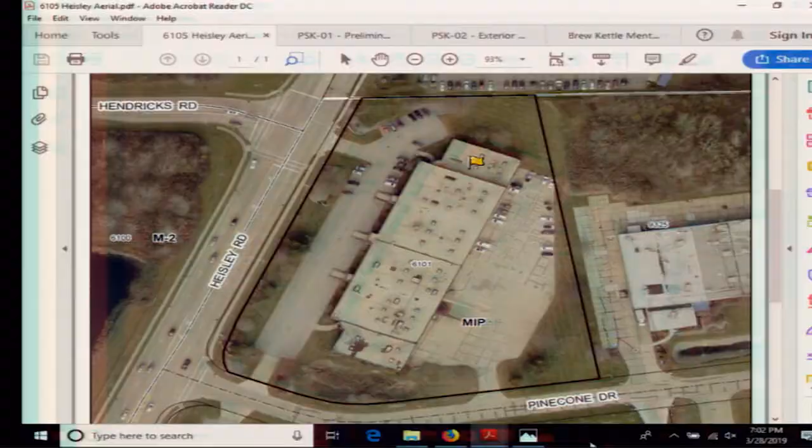Okay, anyone else wishing to speak in favor? Anyone wishing to speak against? Okay, we'll close the public portion. Kathy, anything from the administration? Nothing, Mr. Chairman, other than the conditions noted. Okay, anything else you'd like to add?

I just want to clarify that this will in no way be a surgery center. It's purely office procedures like mole removals, laser, skincare, things like that.

So Mr. Varga can show up? I don't see why he would ever need to see me, but he's welcome to.

So, Commissioner members, any questions for the applicant or the administration? Hearing none, I'll entertain a motion.

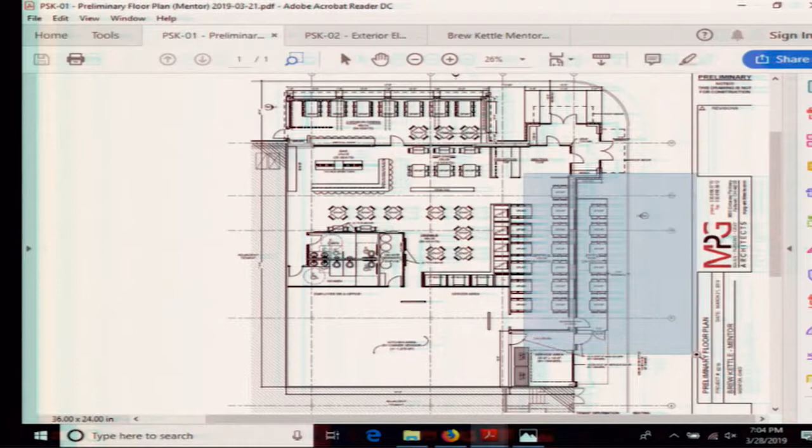I need your name for the record, please. Randy Parsons with MPG Architects.

Anyone else wishing to speak in favor? Anyone wishing to speak against? Okay, we'll close the public portion.

Kathy, any comments from the administration? Nothing other than noted in the proposed condition. You've read the staff report, so you're familiar with the conditions. Yes, sir.

Okay, Commissioners, any questions for the applicant? I have a question. The three-season dining space, that's new to the plan. Yes, sir.

How much space is there between the face of the building and the curb for a walkway? I believe there's 5 feet.

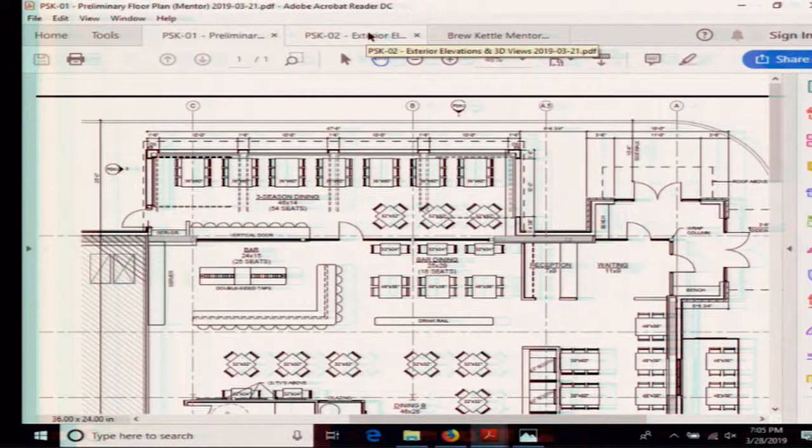Can you tell me a little bit about that space, since we haven't seen it before, and how that's going to work? That's a space that allows overhead garage doors to be opened when the weather's permitting, and allows people to sit out in like a 3-season type space, like you see on most restaurants today.

And it's completely enclosed in metal construction? Yes, correct. The sides are all standing seam metal, and the roof is standing seam metal. I've got a sample of the metal over there. It's the DMI metal product.

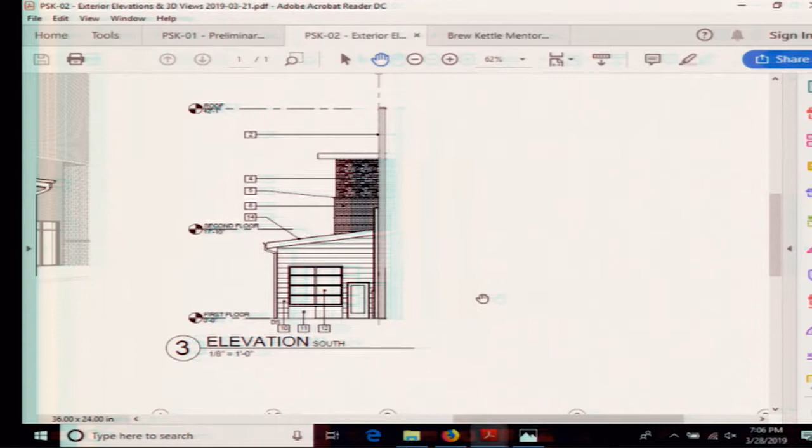Was there any thought about, if we could go back to the previous image, bringing some of that stone in the background around? There's stone along the bottom, and then vertical metal panel above the stone. We're trying to keep a little bit of contrast on the building, so we've got the stone on the building and letting this be its own little element that pops out from the face of the building.

Okay, well, go back again. This also ties into the owner's brand standards that we've generated for him for several other locations he's going to have in Northeast Ohio.

And the doors don't, it looks clearer here, the doors do not go down all the way to the ground. They stop at the sill, correct. So you're not going to have patrons walking out with drinks or what have you. Okay, all right, that's all.

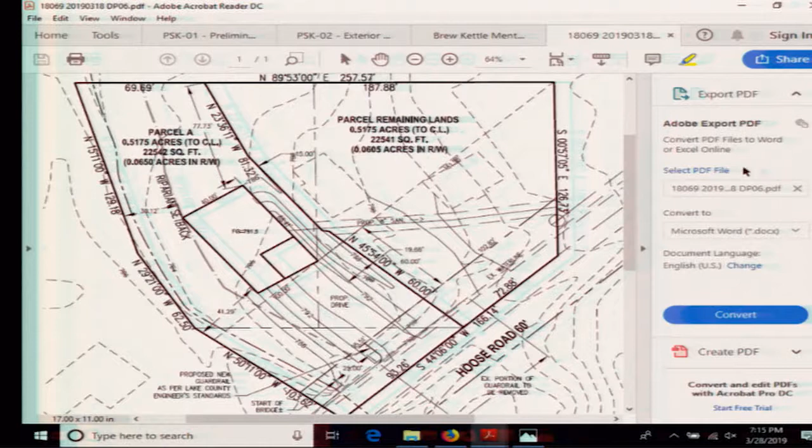We actually did some historical research on this. I'm just trying to find that information - at one time this parcel was combined with another parcel on the adjoining road, and then they split it. I'm not sure why it went through that process, so it's gone through a couple different renditions.

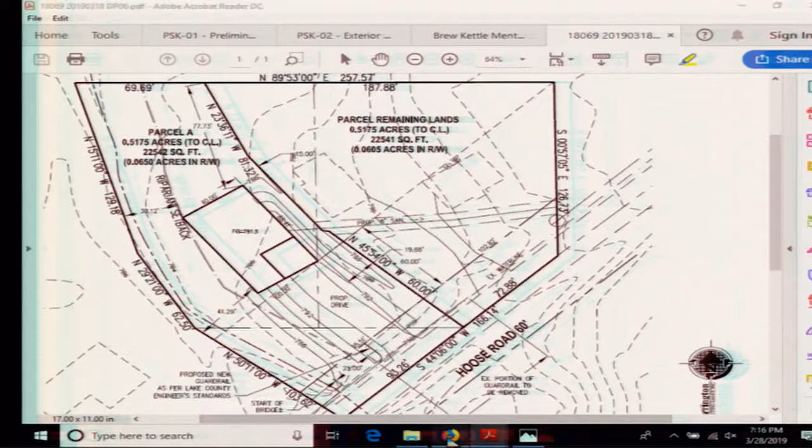We did have it at one point. It was handed out in one of the earlier packets. I don't have it with me at the moment, but we're going to see if we can pull it up from an older aerial.

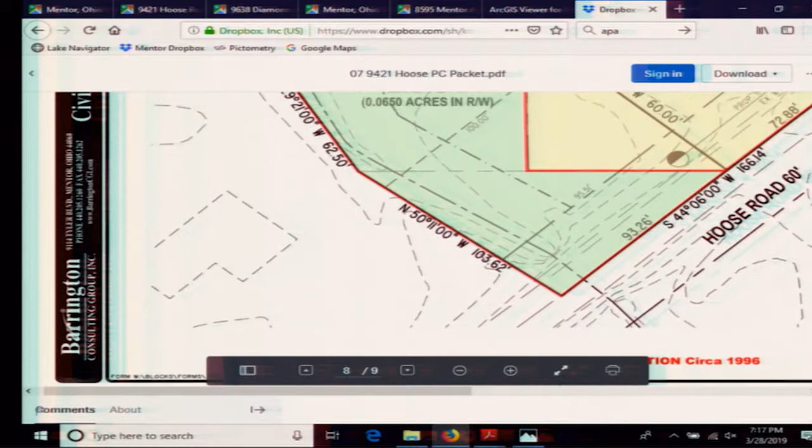That's the- yeah, so that one shows... Technology, anybody here from IT? Yeah, it's there. That's all right, Mr. Chairman. We can, if we shrink it down, there we go.

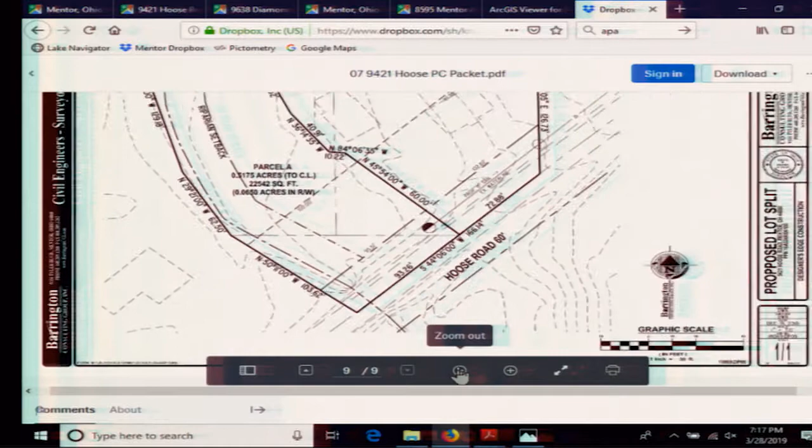The red lines indicate the prior parcel delineations. Do you recall when that was combined? It was combined sometime in the 1980s. So it's been a while. But as you can see there, and again, I don't understand why it changed again.

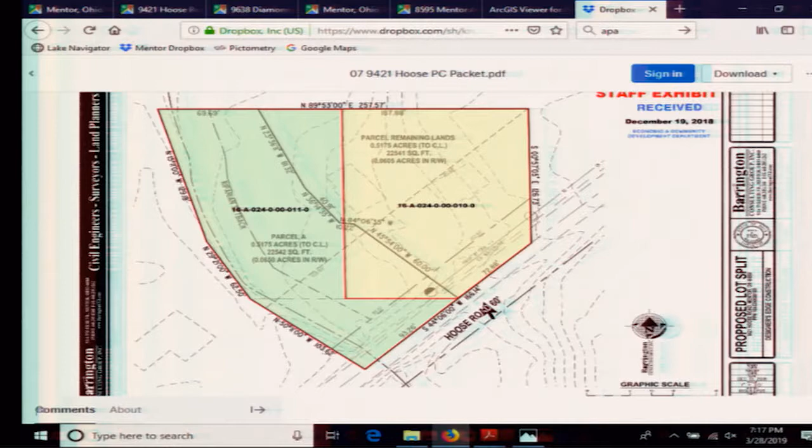It's a better frontage for sure for the lot. It was combined, but at one point it was split into two parcels. It's the same area, so they would still be, in today's code, both- well, they may not be both non-conforming, but I think one of them was. One of them was, one of them wasn't, right?

Go ahead, Mr. Sidoti. Mr. Victor, in order for the house that you're proposing to build to remain in conformance with the current code, you're talking about a 40-foot wide structure by 68 feet deep. Yes, that's what you're proposing? Right.

And the city engineer wanted to know what steps you will take to protect this proposed house should that stream begin to flood that's adjacent to the property. I was going to raise the grade up on that side, probably about 3 feet, and then build a poured wall. I was going to do a poured wall basement at 12 inches wide.

No more questions, Mr. Chairman. Thank you. Anyone else? Any other questions? Hearing none, I'll entertain a motion.

Ryan, would you want to keep that 792 as a condition? No, I mean, it's on his site plan, so I just wanted to be sure that 792 stays. Right, I will. I'll make sure.

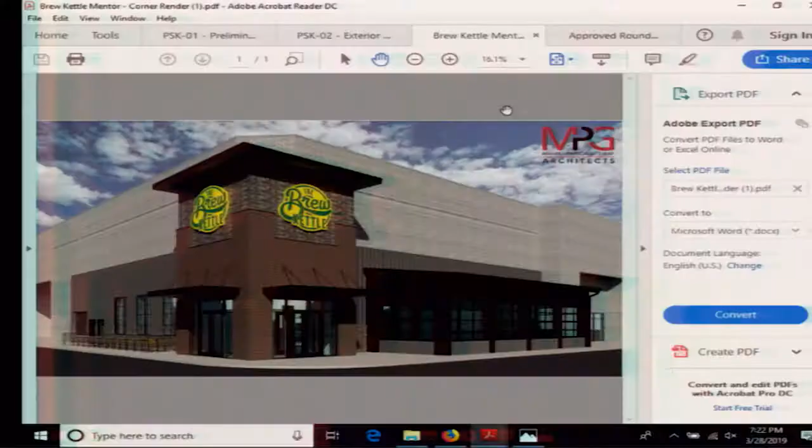We're creating a new restaurant called the Brew Kettle. It's a small chain of restaurants. We're introducing it into the corner of the mall where there was originally going to be a restaurant. This is a new restaurant that we're introducing into the corner.

Kathy, anything from the administration? They were very specific with the materials, and we've noted those in the conditions. And the landscape plan that was provided was actually an existing landscape plan. We would need that upgraded.

Okay, and you're going to irrigate it? There'll be irrigation for the landscaping. Yes, and you'll turn it on? Maybe. A lot of people don't turn it on. That's been a problem.

Commissioners, any questions for the applicant? Mr. Sidoti? Thank you, Mr. Chairman.

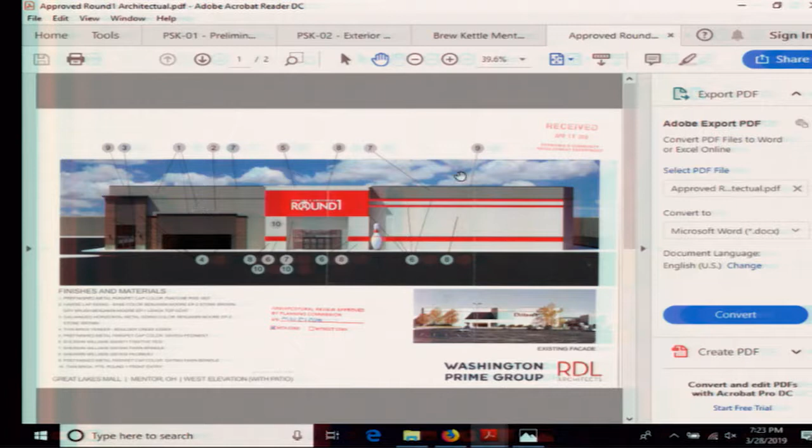On this rendering, the material above the 3 garage doors, do you have a sample of that material? There's the metal, and the color would be musket gray, this is musket gray right here. So it comes in that color? Yes. There's no painting required? No, it comes pre-finished.

Is there any reason you didn't consider extending this brick veneer south to the edge to give it a fuller look? Well, it's the same thing on the other side. We tried to let the new material be framed by the existing building instead of just applying the material, looking at it from a 3-dimensional aspect.

Mr. Sidoti, you might want to look at that particular one, as the previous rendering was slightly modified in the newer drawings, so what you're seeing on the round 1 example is a little different. You can look at the screen up there, he's got the new rendering up.

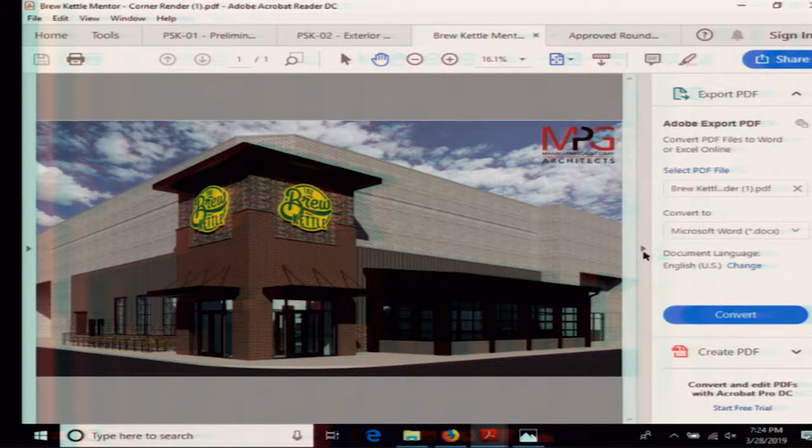And that lap siding, is that what you're putting down on the sidewalk area in front of the... No, there's no lap siding anywhere. It's all metal stone panel, yeah. It's all anodized metal panel.

Thanks, Mr. Chairman. Anyone else? I have a question. Go right ahead.

With the new exterior areas, the exterior patio and the enclosed patio, both are extending out where there is currently a landscape cut out in the sidewalk. What happens to the landscaping, or where does it go? You know, we were asking for foundation, you can see it there on both sides. Now those would be in conflict with the location of the extension. You're correct.

We've worked with Washington Prime on that, and on either side of the main entry where there's a little indent, we're going to introduce beds there. Our intent is also to provide a couple raised planters, large-scale pots, out in front of the facility. So what goes in the pots in the winter? Nothing, that's part of the problem, I think. No, we would provide some mix of materials, so you may have small arborvitae or boxwoods in those pots along with some flowers.

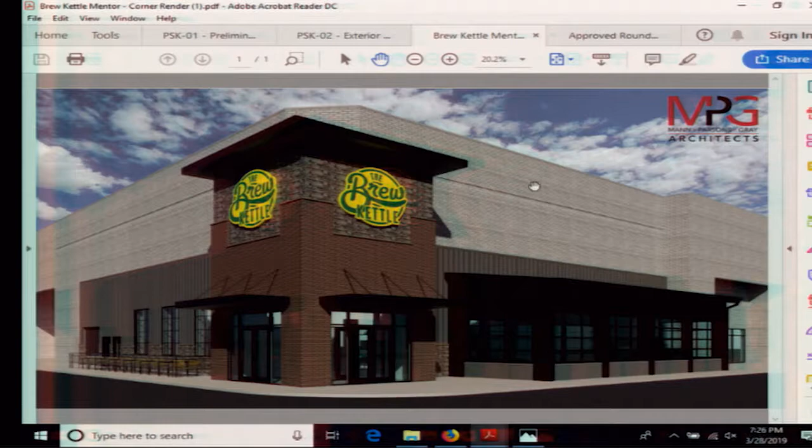Does that meet the spirit of the landscape ordinance? Well, we're going to have to look at the updated landscape plan to really give a fair answer. I think as long as the applicant adheres to the foundation plantings we talked about along the walls and gives us a detailed plant material list, then we can. Which you can do. Yeah, absolutely, they'll receive that.

My reaction is that we can see the area in the back on the screen, where there's both foundation plantings and some islands that still allow for passage. I don't know if they're going to put trees there or if it's just all going to be low landscaping, but we would want to still see something substantial enough so it doesn't look like an afterthought. No, we understand that, sir. Thank you, Mr. Chairman.

Mr. Cook? The outside patio facing north, I'd like to see some sort of hip wall with some vegetation on top, not a complete cover from the existing Macy's parking lot, but while you're sitting there, a little bit of coverage, like a short hip wall with vegetation in it. Or a fence above it. Yeah, not a complete screen, but something to give you coverage while you're eating. The sun will be behind you, so I can understand the desire to have that.

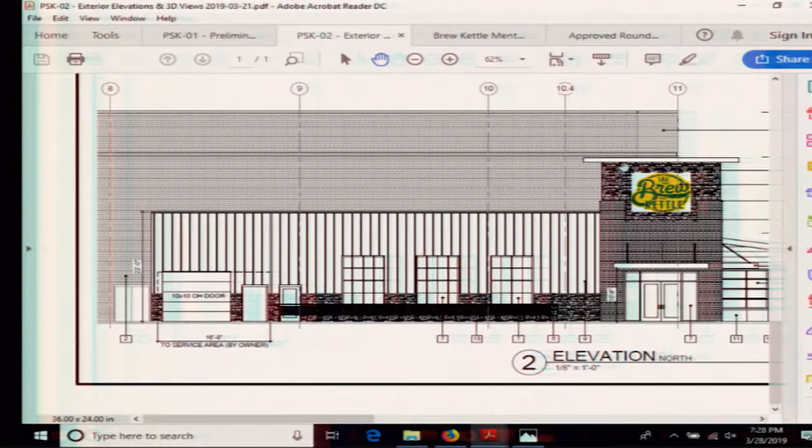One other thing is that when this corner was supposed to be a Primanti Brothers, there was some sanitary work done there, and it's incomplete. So part of this deal is we're going to be installing the grease interceptor for the tenant before they come in and do the work. Okay.

It got capped off in a few places. Okay, we're aware of that. So make sure you submit plans to Lake County Utilities for it. We're working on them right now.

All right, thanks. So let me ask a question of the city. For the outdoor patio with the light gauge fencing around it, yes, we would be looking for bollards. What about the metal building?

To protect them specifically because they're 5 feet from the driving lane. The other enclosed patio, we're within 5 feet of this driveway. Do we need to concern ourselves with a bollard condition there?

I mean, it's really just, I don't know. I guess they'd hit it, right? Well, I thought about that, but it's also almost more like it's just a large window, and I was in debate about that. I was just thinking about the piers, not so much.

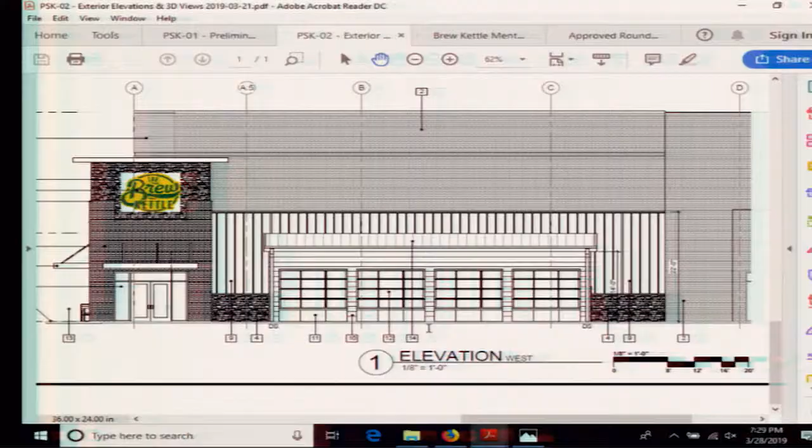That's where they're gonna put the landscaping anyway, right? Yeah, well, there's no room to put landscaping there. Well, they said they'd take care of it. That's just, there's not enough room. Well, I know, it was just a thought. I'm not saying we have to do it. I'm not dictating to do it, but what are you suggesting, for sake of discussion?

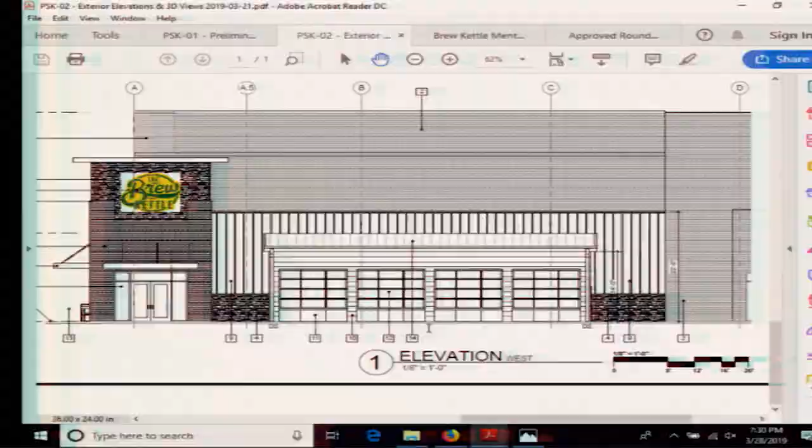I was suggesting that we could provide some steel reinforcing within the wall in the lower portion and on either side of those overhead doors, so that we don't have bollards sticking out in front of the building. Yeah, I'm not trying to force that, I'm just saying. It's almost the same condition, and the metal construction is relatively light gauge. If it was just reinforced to protect the occupants in case somebody hopped the curb and hit the corner, we wouldn't want to see that.

All right, thank you. Mr. Chairman, Mr. Sidoti? The handicap spaces that are being created right now, you have the area cordoned off. Are those for your facility to meet your requirement to provide handicap parking, in front of Round One?

Anything else from the city? Maybe we could add a condition about the reinforcements on that patio wall facing. And when you put the bollards in, we don't want it to look like we're tying off freighters. They need to be some sort of decorative bollards, as opposed to the traditional big yellow concrete bollard. Non-freighter type, we understand. Not an unloading dock.

Anything else, commissioners? Entertain a motion. Where are we at here? How many conditions?

I'll make the motion with 4 conditions, adding the reinforced steel. Second. Mr. Varga? Yes. Mr. Cook? Yes. Mr. Cicero? Yes. Mr. Perkovic? Yes. Mr. Sidoti? Yes. Mr. Tiedemann? Yes. Mr. Snow? Yes. Thank you.

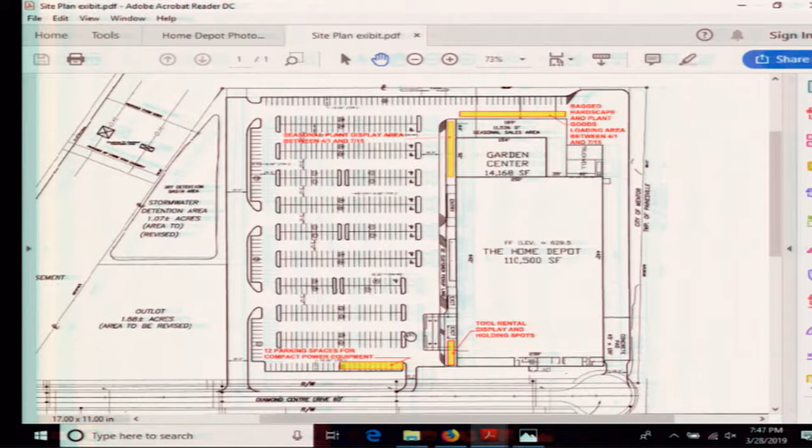You could make it as big as the building as far as I'm concerned, but that certainly would be- rather than put spaces out in front of the building, those spaces I wouldn't have a problem with. Okay, we didn't know that was an option. Well, I'm throwing it out, not making the decision, but I'm just asking. If you could make those spaces down at that end into the equipment storage area, it would be akin to where we already allow you to store the big bags of fertilizer and stuff. And that could be a permanent walled-in area, back within the face of the building.

So behind the face of the building, envisioning a wall that would go that whole length of that curb along Sam's Club then. Yeah, as big as you want to make it, but you could make it the full size of the end of the building there. And you could put gates on it, you could lock stuff up. I mean, we're already letting you store stuff there, right? I don't want to speak for everybody, but I'm just looking for where's the wiggle room here. It's not in the parking lot, it's not in front of the building. Because we could work this same scenario with other people who might come to us and find other acceptable solutions like that. I'm thinking down the road, it's behind the face of the building that you store this in an enclosure.

Mr. Chairman. Mr. Sidoti. I want to piggyback on Mr. Vargas' earlier comments. Ms. Mitchell, you yourself said we're seeing this more and more, okay? And it seems like we're opening the door a little bit each time this issue comes before us. Maybe it is time, Mr. Vargas, to revisit this and decide what do we want to do with these retail establishments and the issues of storage outside. I remember sitting here judging two or three retail establishments, much smaller than this, wanting to put some propane tanks or an ice machine outside, and we beat them senseless and said no, you can't do it. And they leave mad, but we said look, you can't do it, our regs don't allow that. It seems like there's a little inconsistency here.

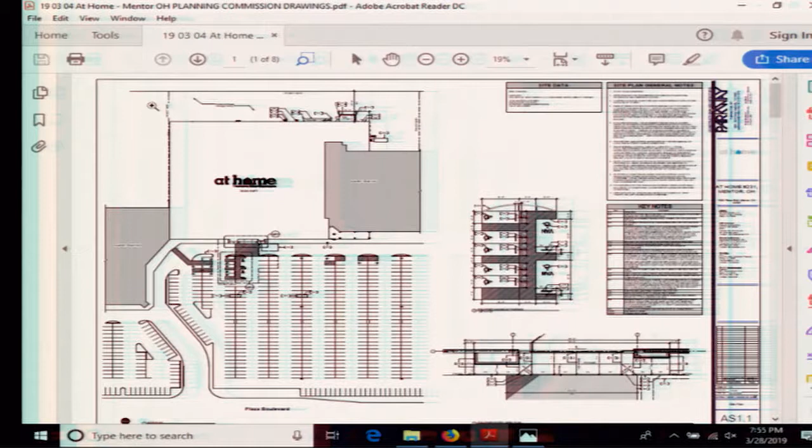As far as the staff report goes, I'd like to very quickly run through the proposed conditions. Item 1, comments should be addressed in writing, which we can do. Item 2, no outdoor storage or display. At Home does not do any outdoor storage or display.

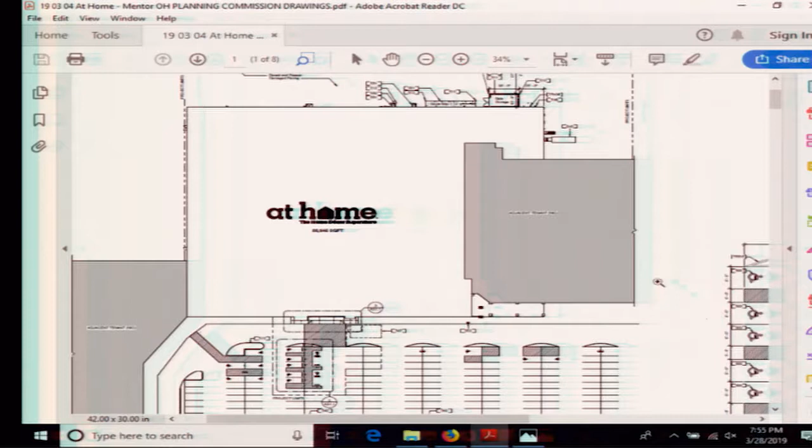The concrete masonry units shall be replaced with a brick similar in size to the existing brick of the building. What we propose to do on that is use a split-face CMU.

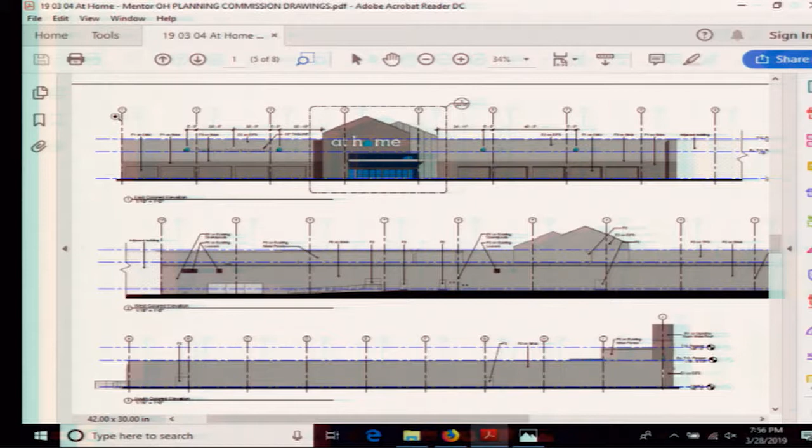On the left side of the building, we'd be infilling the existing storefront glazing. On the right side, we'd be creating a new wall to fill in that current void space. We wanted to establish a rhythm across there, and also wanted to use some varying textures to emphasize that rhythm. We'd like to use the split-face CMU, but we're willing to go with the brick if that's the commission's decision. Approved building materials, I think is pretty straightforward.

Item 5, pursuant to the signs, we acknowledge that the icon light fixtures would be considered part of the signage package.

As far as item 6 goes, the landscape plan, At Home does not control the parking lot or the site. All we have is basically a curbs-in deal. So I'll let Jeff address that.

Currently, there is very little landscaping there. We are more than willing to invest some money to upgrade it, but as you can see, there are hardly any islands in the parking lot. We do have islands separating the parking from the main drive lane and the storefronts, and I think we do a pretty reasonable job of keeping vegetation in there. It's somewhat difficult in that it gets salted all winter long, but we have no issue with investing some money in landscaping.

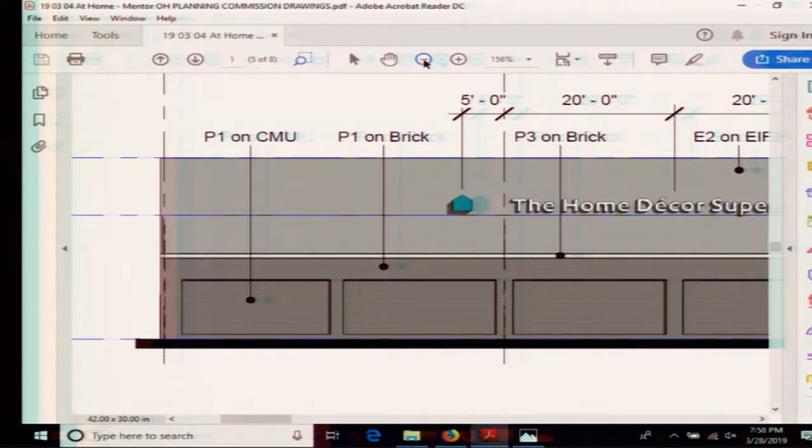And then item 7, the photometric plan. I just got one today, by the way. We can certainly provide that.

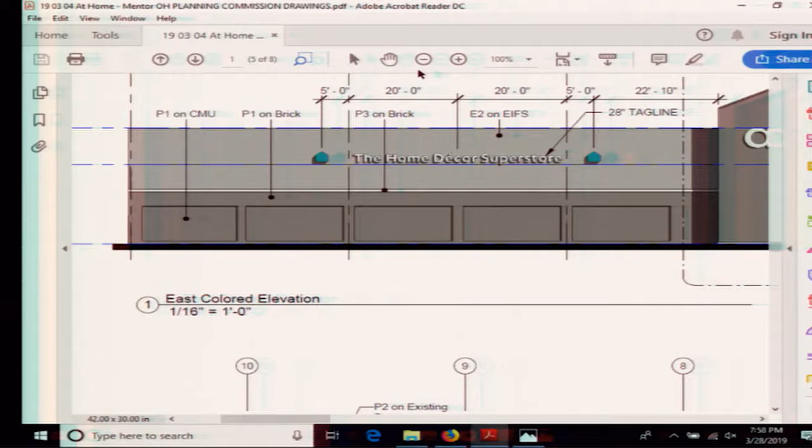Although we'll have to work with them because right now we don't have the information on what those fixtures are and so forth. For the new fixtures, the intent would be on the back and side to replace the existing wall pack fixtures with new LED fixtures. And we can certainly provide the photometrics for that.

Commissioners, questions for the applicant? Mr. Sidoti: Larry, can you go back to that picture you showed when they were talking about the landscape and shows the parking area? Does your project also include repairing and fixing this parking lot? Yes.

Last year, we spent $100,000 on asphalt work. Most of it was done in front of Giant Eagle. I have the same budget for this year, and the plan would be to do the area in front of the proposed At Home.

So it's part of your plan? It is part of the plan, and all I have is kind of a rough drawing of what we did last year and extending it this year. So it's probably not necessary to...

Right, okay, rewire everything. Larry, has the applicant submitted building materials? Just what the building elevations indicate. We just got it switched over.

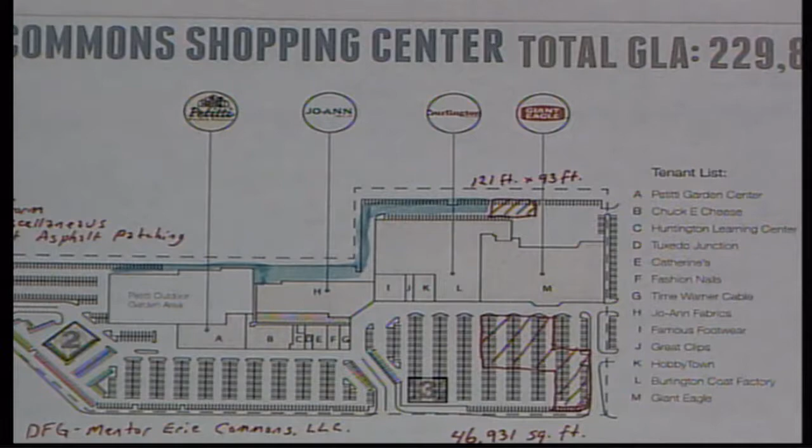Yeah, that's a good point. I was looking on Google at what your stores look like, and a couple of them look different colors, so I'm just curious which version will be put up. Don't forget, let's have a slide that shows the colors a little bit so we can all see some of that.

One of the things I would like to add is Giant Eagle will definitely have a facade change in the not-too-distant future. So I don't think we should spend too much time looking at Giant Eagle and trying to match that facade. I think it would be better if we were to look at Jo-Ann. Okay, go that way.

I want to pay you one compliment. You got rid of the shoe and clothing bin drops in the parking lot. I appreciate that, those were not supposed to have been there. Those companies have a habit of just dropping them, and they tend to disappear somehow.

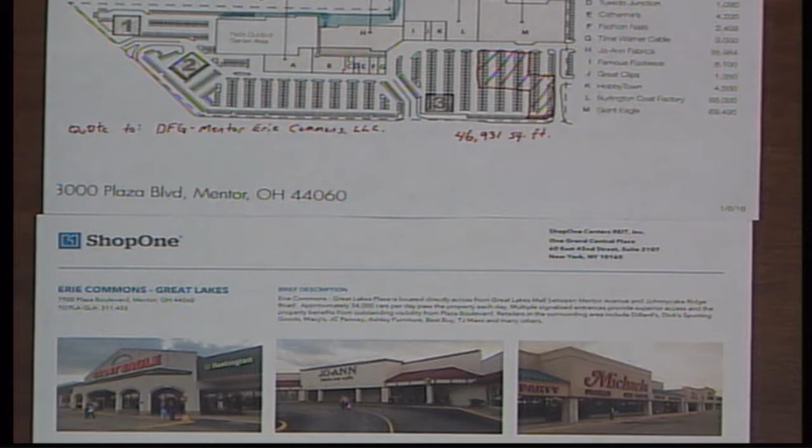Take a torch to them? No, I'm kidding, I make a phone call and they go away. And there was one that was in Great Lakes Plaza not that long ago. Right, it is gone now. Okay, good.

I just want to emphasize what Mr. Sidoti said. I am curious as to the coloring, because there's different versions you've done, or the franchise has done. I'm not totally sure of what you're looking at.

What we're proposing is the blue, or there's a blue finish and there's more of a beige-gray finish. I think that may be the effect of the sun. The colors, the At Home dark gray and the At Home Jennison light gray, have been the standard colors for the last 5 years, and we propose to use that on this building as well.

That's what the CEO likes, and that's what gets approved. Yeah, and I'm not opposed to it, I'd like to see it.

Understood. And along those same lines, this town is very sensitive about liking to see brick. So in terms of block, a utility brick or a modular brick, any kind of brick you want, but they'd rather see brick than see block, especially split-face block, which doesn't make people happy around here. So then the question is the color of the brick—in this environment, do you match some of the other colors, or is that dictated by corporate?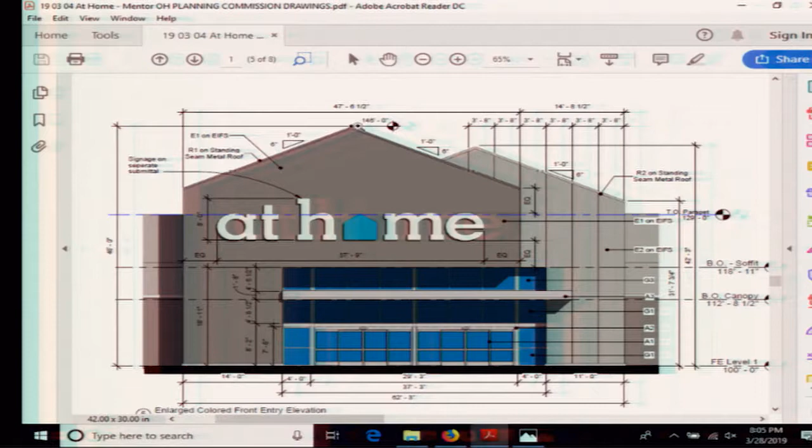And there's one other comment that I would like to make about the existing architecture. The entrance to what is currently Burlington—one of the reasons this is before you now is Burlington wants a store less than half the size of what they currently have. They are going to be moving to the former H.H. Gregg in the shopping center next door.

So what you have there are actually interior ceiling tiles on the underside of that canopy. That is a remnant of when this was a mall and that was an interior section. It is a hideous architectural element currently, and At Home is going to make that go away.

No, I'm speaking for myself. I have no problems with the nature or the character of the project, other than we need to see the materials and the colors displayed so we understand the environment that it's in and how it looks. Barry, do you happen to have the samples?

May I have the envelope, please? If you want to get those out of the way, or turn them upside down so they have a white surface.

The typical exterior scheme is light gray on the upper portion, dark gray on the lower portion, with Sherwin-Williams Greek Villa as the precise color—basically just a slightly off-white that acts as a pinstripe separating the two materials. And then this would be the EIFS used for the main entry feature, and the roof samples for the standing seam roof on the entry feature.

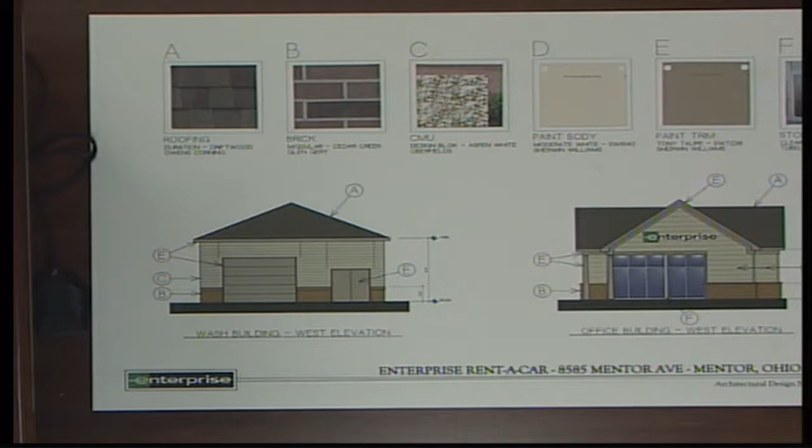So the two I have some concerns about: Number 2 was talking about the window patterns on the building. That elevation that shows up on there shows the side view. It doesn't really show the street view. Let me see if I got one here.

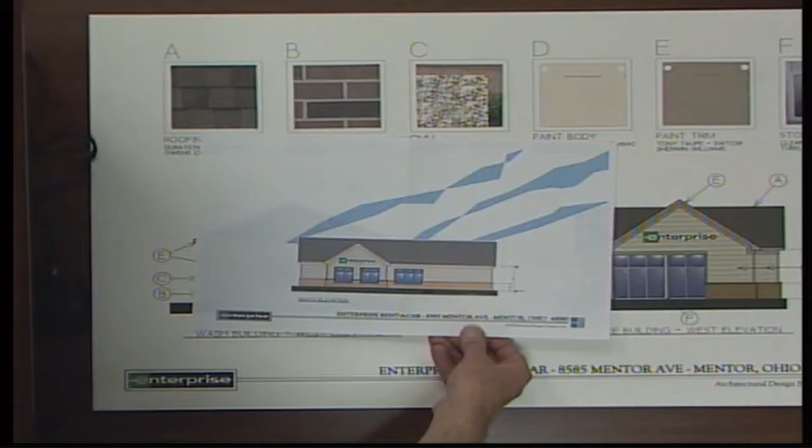This one shows the street view. We're not strongly opposed to revising it. We did send in a revised elevation to the city as well to look at. My preference would be to stay with the aluminum storefront.

The primary reason we would like to stay with the storefront is it's just a little bit heavier duty product, and with the amount of traffic that we get through there, I just think in the long term we're better off with that particular product.

I will say that in our design, we do have a window pattern that is a kind of punch window pattern, which is pretty consistent with what the older buildings were. If you go down that street, the residential structures, a few one-story, some two-story, are all really similar with a punch window opening. The primary difference is those particular windows were double hung windows, common in the early 1900s when those were built.

So we're not really putting a double hung window on there. It may not be really apparent in the initial drawing unless you look hard, but in addition to the storefront, we do have all those windows cased. We're using a brick mold around the windows that kind of reflects that, so it's not like just a straight aluminum storefront that goes right to the siding.

Because we're very concerned about trying to get through tonight and move this project along. The elevation above shows using more traditional clad wood windows like you'd find in a residence. The primary difference with the windows above versus below is you have a double hung window in the main portion with a transom above. I widened the casing on those particular windows and added a little bit deeper head across the top.

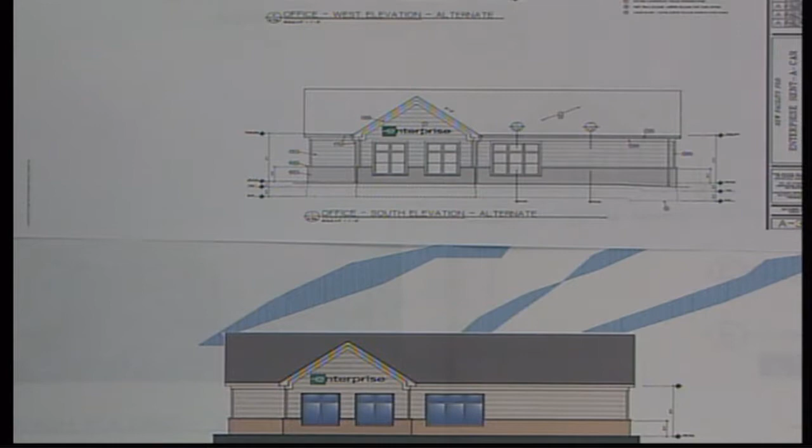What happens when I make that change to the windows, I also want to change the elements at the entrance. So instead of a storefront where I'm looking for heavy-duty use and durability, I end up going to a clad residential, light commercial type of unit. It gives a rail and stile door look, with some fixed panels and one panel that operates, giving a more traditional residential look, but I don't think it's quite as durable. Preference would be to stay with the aluminum storefront, but if the commission has difficulty with that, we could move to this type of unit.

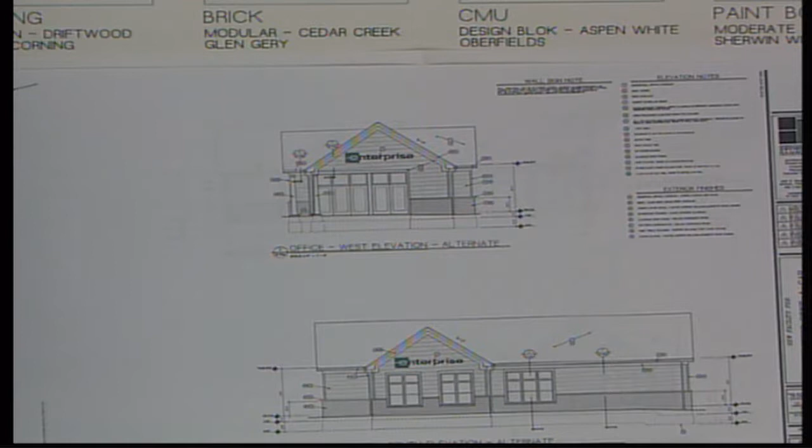The second issue, and the one most critical to Enterprise, is the photometric. We've submitted two photometrics to the city for review. Could you flip up the site plan? That would be really helpful.

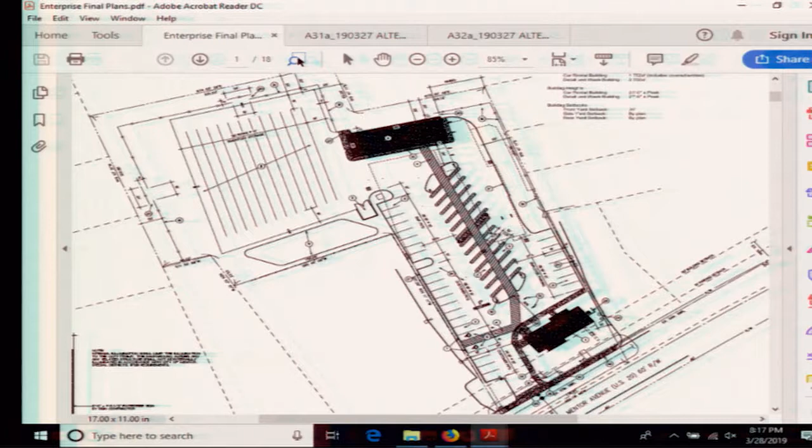One thing I think is important to understand, and I think the commission understands it, but where we're running into difficulty with the city code is that center strip area where the cars are dropped off and picked up by customers. The city is treating that as a parking area. The problem with calling it a parking area is that since we're doing pickups and drop-offs there, it's very important that we be able to inspect the vehicles when they come back, and customers have the opportunity to go around the cars and verify they're in good shape.

The lighting levels the city looks for in a traditional parking lot are extremely low and don't offer us the opportunity to provide the kind of light necessary to inspect these vehicles. So what we did is provide a photometric that illuminates that strip with much more intensity. The city always talks in lux - I keep thinking in foot candles - but we're approaching 30 foot candles on that strip area in order to inspect the vehicles. We've done this on multiple Enterprise locations; it's very important to have adequate light.

On the second photometric, when the store is closed, we would dim all those lights. Once dimmed, the entire parking area falls within the city requirements for illumination. So it's important to us that we be able to illuminate that center strip area to higher levels during the times the store is open.

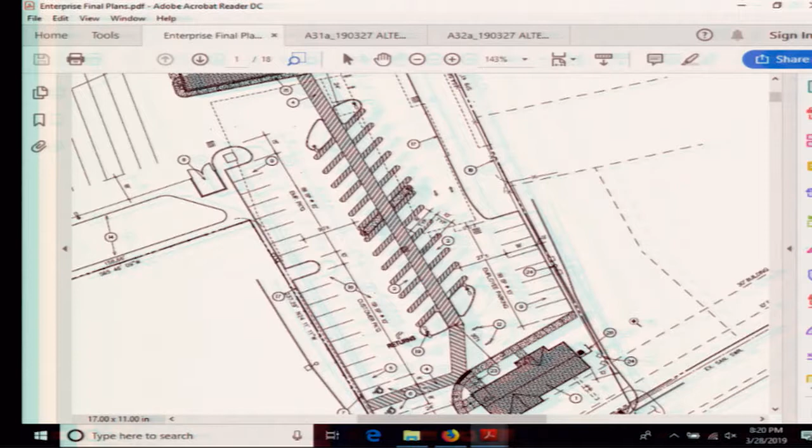I'm going to interrupt you there for a second. I'm not sure that's within our purview at the commission level to deviate from those lux requirements. I think if you want a deviation, that's something you'd have to take to the BZA. So you're looking for a deviation on the light plan. We have a plan in place, but I don't know that the commission can change that requirement. Also, if you're familiar with 116903, it talks about the general requirements - there are ways you can make part of the parking lot brighter and less bright.

The problem is that we're much higher than that 300%. Part of the issue we're talking about is you're assigning the lighting levels in this area as if it's a parking lot. But it's really not a parking lot. It's a different function. While there are vehicles there, it's not like a traditional parking lot you'd have in front of a building. So while those rules apply, I think we're a little different than that, and we should treat that area differently.

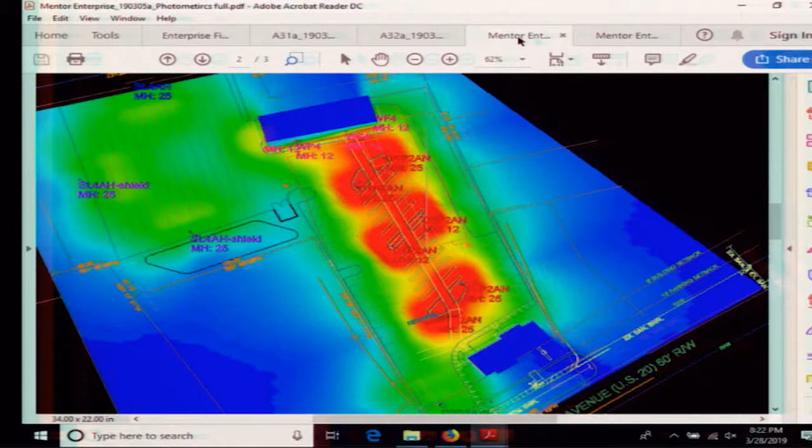Mr. Chairman, this is directed to the city. I think we kind of talked about this a little before, but if we classified that the same as an auto sales area, would that give them the lighting levels they need?

So they reference IESNA standards. We have the reference to that, and it does talk about the allowable lux specifically for car dealerships. When it's not adjacent to the roadway, other rows, which this would qualify as an other row, the maximum illuminance in lux and foot candles is 50 to 100.

So we're less than 50 foot candle. We're running around 30, less than probably on average a little bit less.

Yeah, 50 lux. In lieu of dumping this down the road to BZA, which could be a functional way, if we just classify it relative to our review as a sales area — it's a lease area, but we could interpret it as being a sales or transaction area, right? Then they could accept that. Could we accept that as the definition? And then put the timer and dimmer on this system so it shuts down in off hours as a condition, and just say it meets it relative to a sales area or retail area, relative to automobiles.

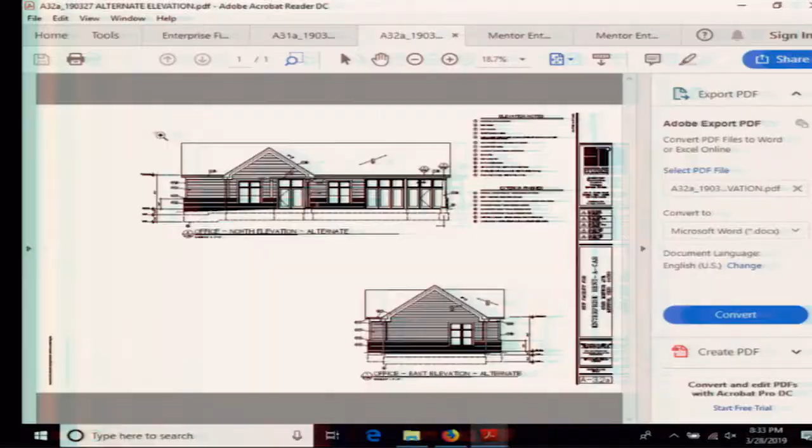I understand his point with regard to the durability, and there are a mixture of windows. One of the windows, he provided us some examples. I do like the updated feature, to be in keeping with that village core that we've been trying very hard to be consistent with, the Brunner Building across the street. That's a nice example, the Brunner Building.

You said you were going to pull that up. Yeah, me. And you said you don't have a particular preference one way or another with this. I'd rather stay with the aluminum storefront for sure. He prefers the aluminum. But I'm trying not to put words in his mouth.

You got me home on the lights, I'll get you home on the windows. Okay, so we're looking for the more divided light, if that's residential, if that's your preference. I know that was the preference over here.

I would support that as a general approach. Go back to the picture. Go back to the commercial windows right there. See, there in that tire store, the lights are more divided. It looks a little different, it's not just a big glass window.

Are there grids in there? Is that what that is? Yeah, I'm not sure. Oh, there you go. And the size of the glass, we're not saying duplicate that, we're just saying this shows up in other places. If you look across the street, I can put a grid in the storefront. Is that what you want to see? Is the grid the thing? Because then we can all be happy.

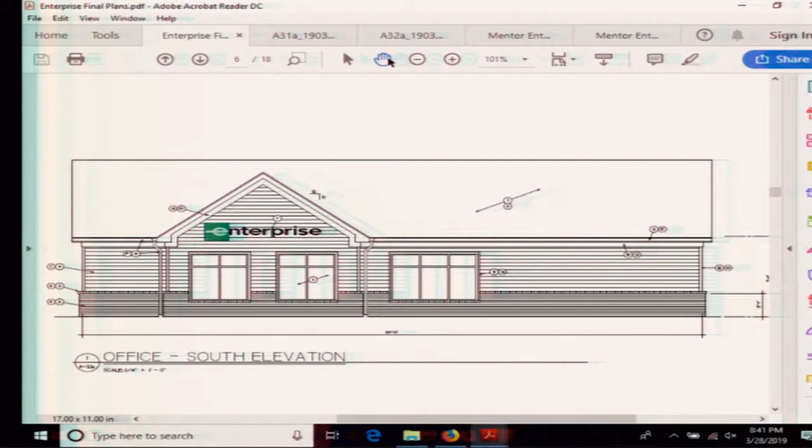Is that a motion? Well, yeah, with the elevation. Which elevation are you accepting, just for the record? The combination, the one on the screen right now—no, not that one. The original one, I'm sorry, the one we looked at before with the additional alternate—that we would accept that, and the round downspouts.

With the additional casing, yeah, that. But are we doing storefront windows, or are we not doing storefront windows? We're doing that elevation 100%.

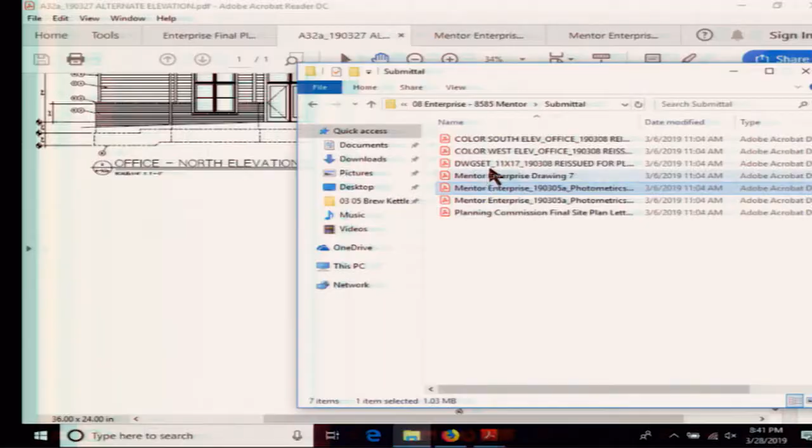Hold on. Right now the condition reads: minor design adjustments to the windows of the front building elevation to better reflect the desired look. It's generic, so it needs to be a little more specific. We're talking about the windows having additional trim, casings, wider casings, and deeper head.

Can you create the 3 panes with the storefront you're working with? I thought the last thing we were gonna do is on the transom—go ahead and do 3 lights on the transom. Okay, that's what we were gonna do. I'm losing track here myself a little bit. So we'll get the three at the transom, round downspouts, the enhanced trim. Yes.

Is that it? Is that a motion? That's a motion. Good. Is there a second? Second. Mr. Varga, yes. Mr. Cicero, yes. Mr. Cook, yes. Mr. Perkovic, yes. Mr. Sidoti, yes. Mr. Tiedemann, yes. Mr. Snow, yes. Thank you so much.

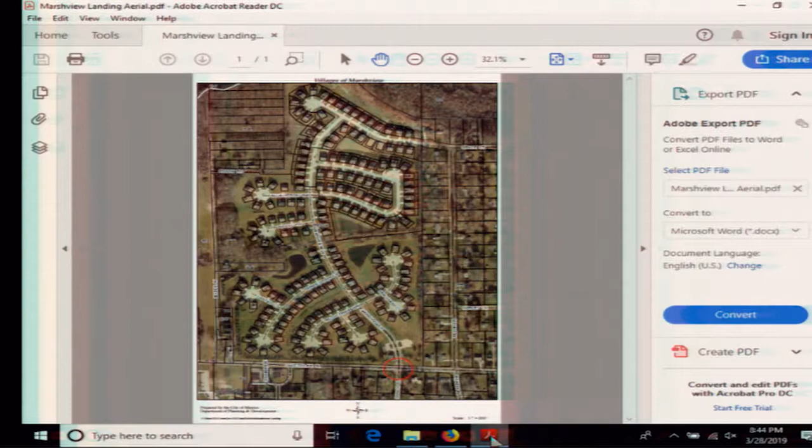The development, as you can see in the aerial I provided, is almost entirely built out. There are only 3 lots left that were vacant, if our data was correct as to when it was last updated. Franklin Development Company approached me and asked if there could be some determination made as to whether there would be a need for this traffic signal in the future, because the condition was so open-ended.

When we reviewed the minutes from the 2004 Planning Commission meeting at the time of the rezone, there was discussion on evaluating that need in 4 years. However, that 4-year timeline was not carried into the condition.

So after speaking with the law director, we had an internal discussion at our traffic working group meeting, which consisted of our engineering department, public works, police department, and fire department. We analyzed whether they felt it was necessary or warranted to install a traffic signal at the intersection of Lake Shore and French Boulevard based on the build-out of the development. It was unanimously agreed that it was not necessary, not needed.

Okay, so what do you need from us, a vote? We need you to waive that condition, by motion, so that it's no longer required.

Generally we haven't voted at the director's report at these meetings, but since it's a request of the law department, I think we will. Yeah, I think that's fine. Okay.